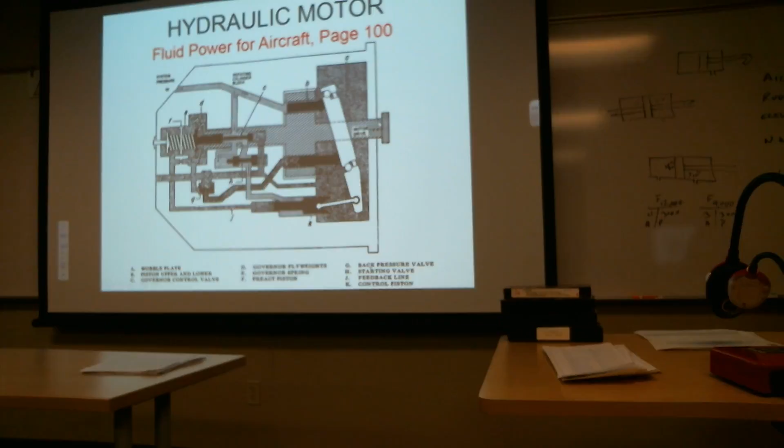Fluid flow coming into the motor slows it back down again. Similarly, if the motor shaft starts to stall or move at a slower speed, that influences the flyweights so they move closer inboard to each other, so there's less centrifugal force.

You'll pour more hydraulic fluid into the motor in order to speed it back up again. The valving is primarily controlled by a pilot valve. We've got the introduction of hydraulic fluid from the pressure source that comes into a valve labeled C. It's a governor control valve.

That immediately pushes over one of the slides on a different valve labeled H. It's a starting valve, and what that does is push this wobble plate over. That establishes the initial direction of rotation one way, so it can't reverse itself. It can only go in one direction of rotation.

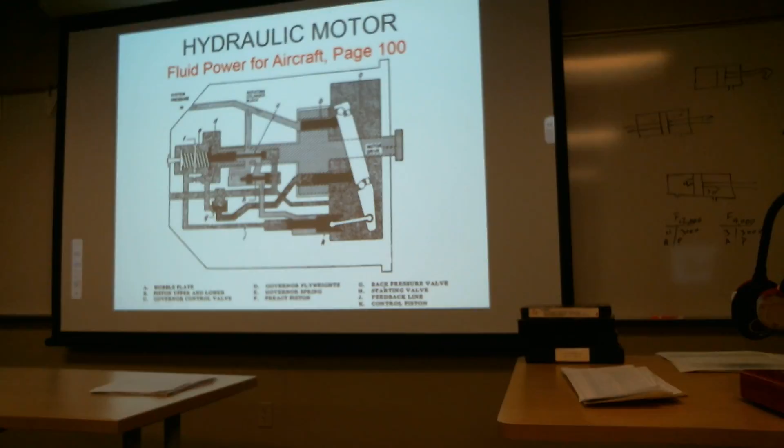From that point on, the speed is really governed primarily by moving this particular pilot valve piston back and forth, the governor control valve, and the opposing force would be the flyweights and this big spring that they have on it. So it limits the amount of fluid directed into the cylinder block and will control the speed of the hydraulic motor.

Examples of something like that are anything where we have to have the same speed all the time regardless of either pressure or the load imposed on the shaft, so we'll use a hydraulic motor. In this case it's non-reversible, but it provides for a governed type of speed. So it's a governed type of hydraulic motor.

There's an interesting device on back of the flyweight assembly piston. It's a pre-act piston. The pre-act piston prevents premature hunting of this pilot valve that's being moved. It provides kind of a counterbalanced force against that piston, or at least against the control valve, so it doesn't move too quickly or seek a position in excess of where it's being commanded to.

The adjustment of it—sometimes they've got an adjusting screw on the back of the hydraulic motor—influences the spring pressure on top of the flyweight assembly. So again, we can somewhat alter the set point for how fast that motor is going to be driven, or how it responds to torque. That's what they have.

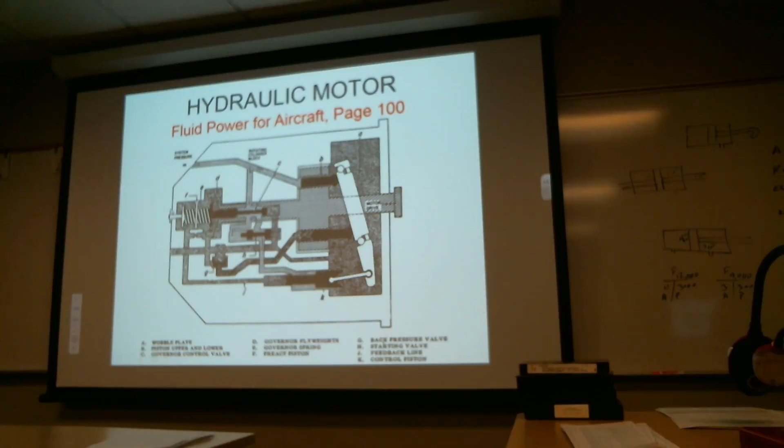A different type of hydraulic motor is a modification of a vane pump. It uses vanes, but rather than attempt to produce flow, we'll introduce flow into the pump from a pressure source and have a recovery point at the return. But we can make the entire core of the pump move.

What you're doing is trapping fluid between the vanes and the wall of the motor in order to make it rotate. These things can also be driven in alternate directions of rotation by using a selector valve that pours fluid alternately into the opposite cavities to make them work. Because it's a vane type, the rotor can be turned in either direction simply by reversing the fluid flow path into and out of the motor.

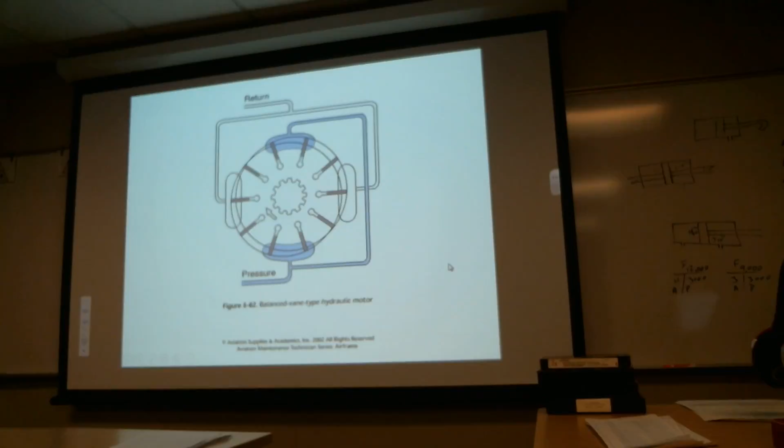Let's talk a little bit about flight controls for aircraft. I've already told you that for many hydraulic systems, they sometimes use a balanced actuator. In this case, I guess they've got a balanced actuator for the most part. But for a lot of aircraft, they use what are called tandem actuators for flight controls. These receive inputs simultaneously from independent hydraulic systems into a control spool actuator, or a control portion of the actuator that's physically attached to the actuator itself.

When we port hydraulic fluid into each of the cavities, the cavities become pressurized and will recover fluid from the alternate cavities. This is an attempt by the airframe manufacturer to provide redundancy in the hydraulic system. If we have failure of one hydraulic system, we'll still be able to use the other hydraulic system to power the actuator to make it move back and forth. So this provides for a degree of safety.

A lot of military aircraft and some civil aircraft use tandem actuators, and it goes to the same control—you might be powering an elevator, an aileron, or maybe a rudder—but nevertheless, you're using simultaneously two independent sources of hydraulic pressure.

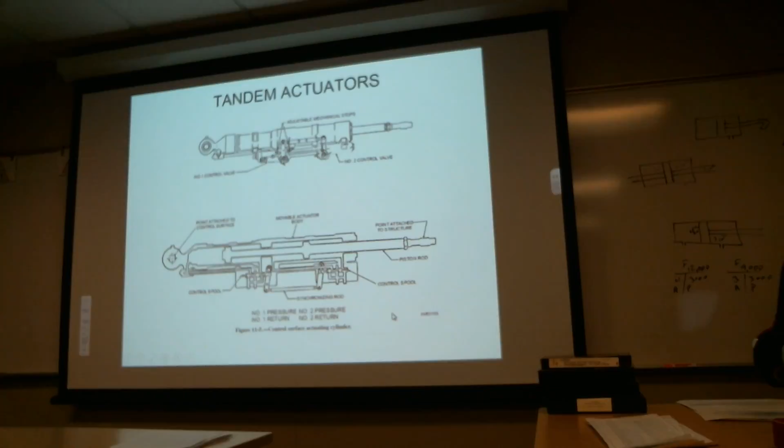We can set a desired course or path for an aircraft by commanding the actuator to assume a certain position. When we talk about tandem actuators, they've usually got two cavities inside of a single actuator. It saves space, but most importantly, we've got two separate hydraulic systems simultaneously driving an actuator. Sometimes another term used is redundant. So they've got two actuators essentially combined into one, but they're being fed from independent hydraulic sources.

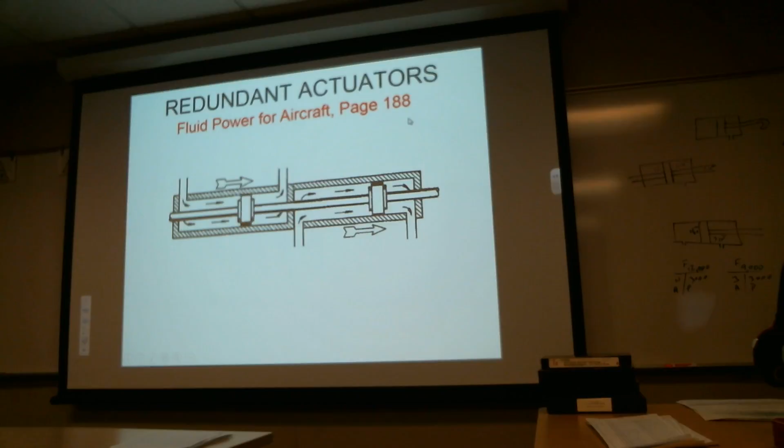There's a picture of this on page 188 of your airframe book. So redundant and tandem kind of mean the same thing.

Rack and pinion actuator. This is still a linear actuator, but what we can do with it is move a piston alternately with a rack that's attached to the piston, and then a pinion that rotates back and forth. Some Cessna landing gear, the 172RG I think, uses a rack and pinion type of actuator. The travel is usually about 90 degrees in order to make the gear come up and go down.

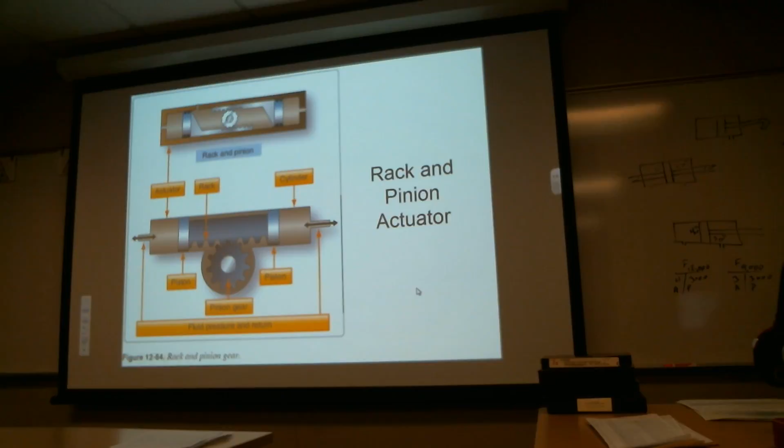There's another variation of it too. You can have a pinion, and as it rotates, it forces the pistons out, but you can see it's got kind of two pistons on the inside of it in order to make it move. Sometimes, again, maybe I'm thinking windshield wipers - some of the actuators operate that way.

Here's a close-up view of what you might find in some Cessnas for gear retraction. The piston could slide back and forth, but the teeth around the rack gear cause the pinion to rotate through an arc of about 90 degrees. The pinion shafts that hang out are attached to the gear. In Cessna, they use one rack and pinion actuator for one gear and another for the other gear, so you've got two in it for the main gear itself.

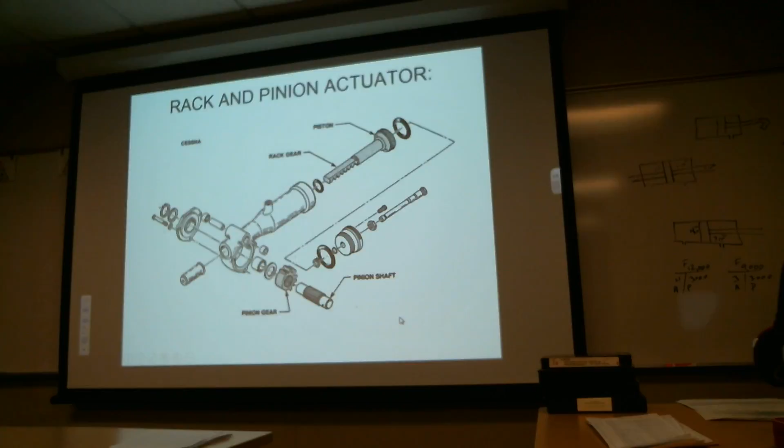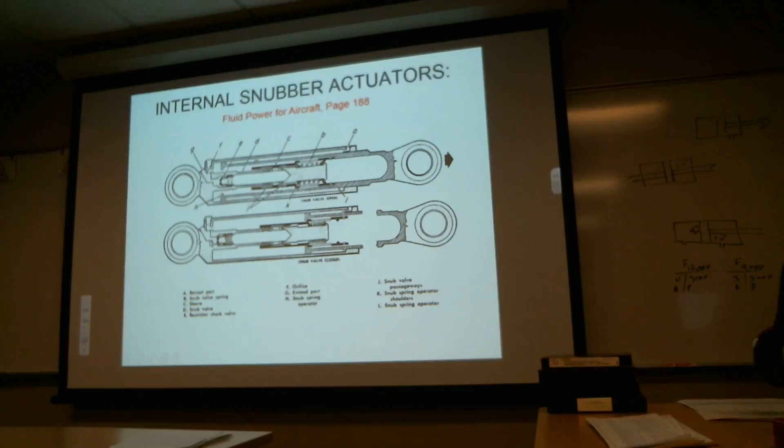If we want to cushion the actuator so it doesn't come to a crashing halt, this is how we would do it. The actuator will ultimately reach the end of its travel, but in a kind of graceful manner. It's going to slow down greatly before it reaches the end of its stroke. There's a lot of different ways that we can do that too.

This is an example of another type of cushioned actuator that they use on the E-2 aircraft for the landing gear. It works in a way that's very similar to a shock strut. If you were to dismember a shock strut, what you'd find on the inside is a metering pin, and as the piston is being slid forward, the metering pin finds its way into an orifice opening.

And that restricts the flow at the end of the travel. This one is kind of unique in a way too, because it's got a port that expels atmospheric air as the piston is being pushed over. And it's got a spring on the other side that will allow the poppet, I guess in this case, to also act as the cushion at the other end.

Kind of unique also with the actuator too, is one of the ports - this would be the down port for extension of the gear - contains an integral shuttle valve. The normal extension pathway is for fluid to enter into the shuttle, so it displaces the shuttle valve one way and allows fluid to enter into the cavity.

And if we do it for emergency extension, they use a confined gas under pressure, maybe a blow-down bottle, in order to accomplish emergency extension. So when we release that air charge, what it does is push the shuttle over, and it occupies the cavity in order for extension.

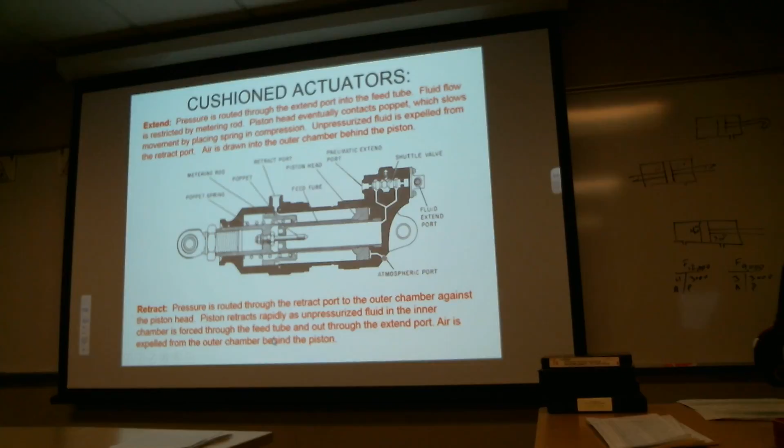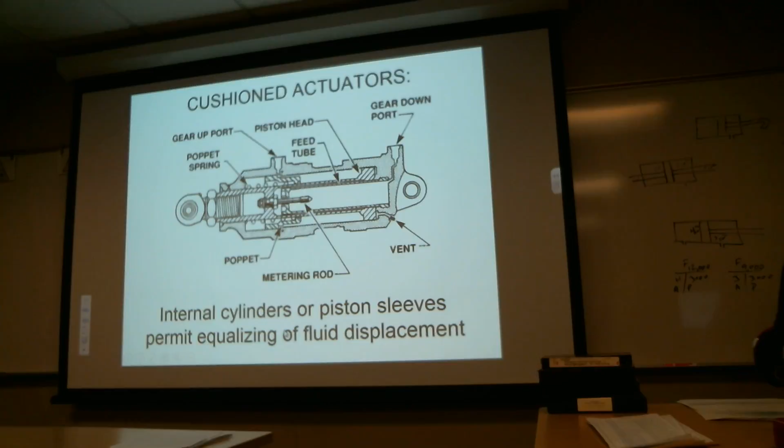Lock actuators - there's a lot of different ways that we can play this game too. If we have to have an integral mechanical lock in an actuator, like a landing gear, what we do is make one by having maybe a particular part of the actuator slide into a recess and be held there mechanically, sometimes under spring pressure.

In this case, they're using a ball lock. And what they're doing is forcing the balls to come out of a recess in order to make the actuator move. And then when the actuator moves to the alternate position, the balls fall back into a recess in order to provide for locking it.

So this one, the top picture, is gear down and locked. Balls are held in the race detents by a ball lock plunger. So I guess they're pointing over here - okay, they've got a ball lock plunger and they're holding the balls in position.

Down lock switch actuated by piston shaft groove. This device over here is really coupled to the indication system of the aircraft for gear down and lock. So when the gear is down and locked, this roller is in a recessed area, which completes the electrical circuit for gear down and lock.

When we want to unlock the gear, we have to apply pressure against the spring in that piston. It causes the balls to drop free out of the recess, and then hydraulic pressure can eventually move the piston. But you're using a mechanical lock that you have to physically unlock with hydraulic pressure to get it to move out of the recess. Down lock is released, piston shaft assembly retracts, and the gear is unlocked.

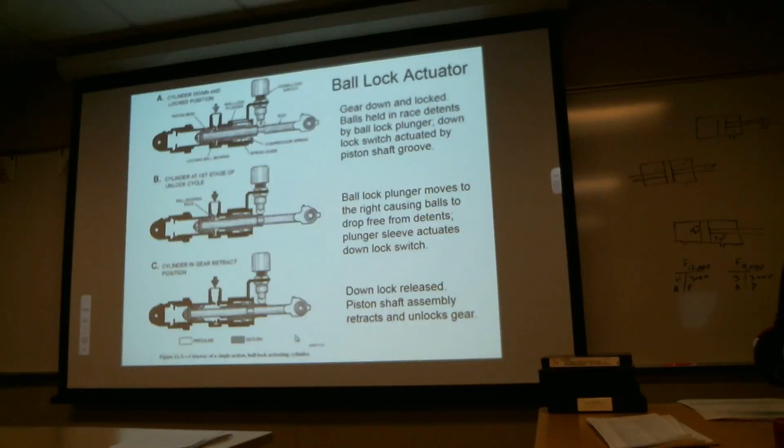This is kind of like what we have on the S2F landing gear. They've got a finger lock type of actuator where they use fingers that fall into a recessed opening, under a spring lock. And remember, for all landing gear systems per FAA regulation Part 23, the locking device for hydraulic landing gear cannot be hydraulics itself. It has to be a mechanical lock that has to be unlocked in order to allow the gear to retract. You can't use hydraulic pressure to keep the gear locked in the down position.

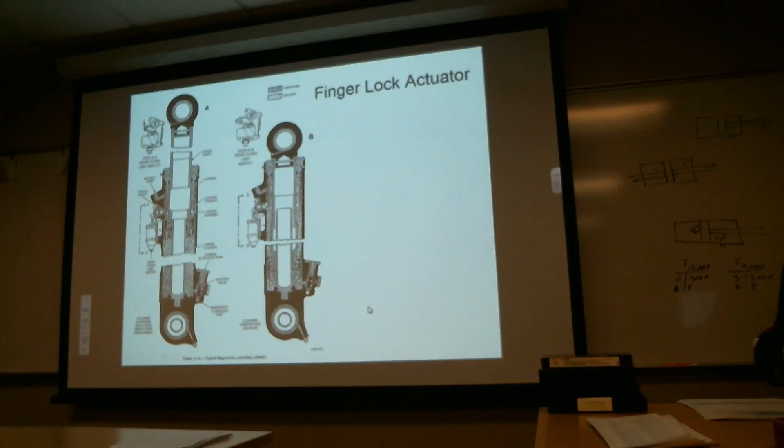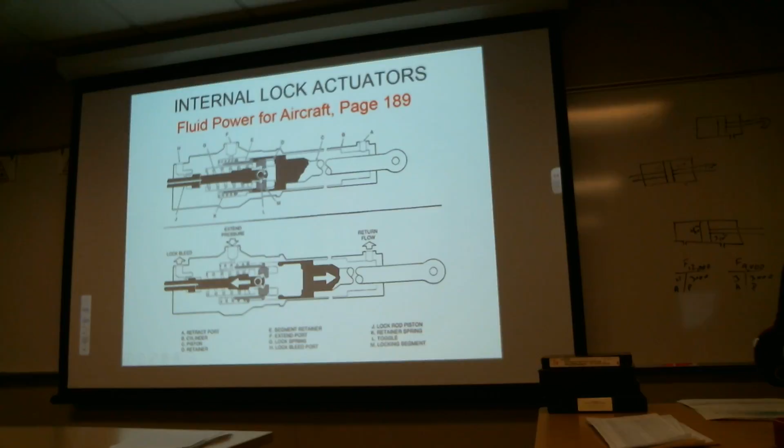There's a reason for that - obviously if hydraulic pressure is lost, there's a potential for collapsing the gear. So we have to have a mechanical lock incorporated as part of the down lock. Another type of internal lock uses a locking block with fingers attached to the piston. In the unlocked position, the initial force of hydraulic fluid forces the spring to collapse, and then these locking blocks fall out of position with the fingers attached to the actuator, and the piston can move. But again, you're using a spring with these mechanical blocks holding the piston in the locked position, and it can be unlocked hydraulically. However, you have to have the mechanical locking device installed so that loss of hydraulic pressure won't cause the gear to collapse.

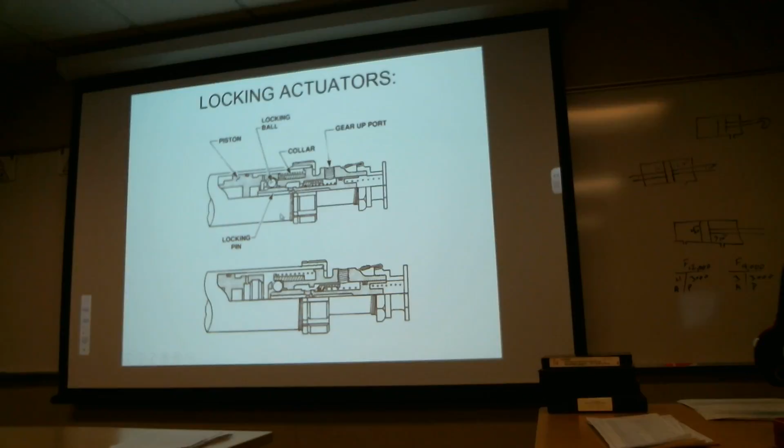Another type, a locking ball actuator, maybe a different view of it. This one looks like it's in the locked position. The ball is held inside of the recess, and then we apply hydraulic pressure. It pushes a piston over, compressing a spring. The ball drops out of the recess, and it allows the piston to move. Better view.

Okay, let's talk a little bit about servo actuators. Let's go talk about flight control systems for aircraft. This is kind of a cobbled together picture, but it gives you the idea of what we're trying to do with powered flight controls in aircraft. What we want to do is limit the travel of the actuator to a commanded position, just like steering your automobile. If we turn the steering wheel, we want to position the wheels on the ground to a certain amount of displacement. We do the same thing with flight control systems.

Now, it's crude in a way because many of the actuators for flight controls are balanced actuators, but for simplicity, just to illustrate the idea of a servo actuator working, they're using what appears to be an unbalanced actuator. The selector valve is physically coupled to the rod that's connected to the actuator to make the flight control move. So there's some type of connection that goes into the cockpit - it's a mechanical control in this particular case. If you pull on the rod attached to the connection point, you're positioning the spool, or pilot valve spool, in one position. That allows hydraulic fluid under pressure to be applied through the selector valve, ultimately ending up in the cavity of the actuator it's attached to.

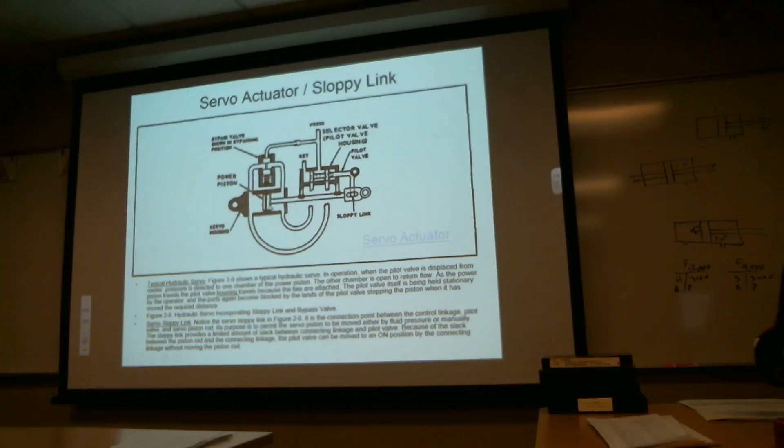This explains how we're getting powered movement, or at least multiplication of force, for hydraulic systems. This thing is actually minuscule in size for the amount of surface area that's exposed to fluid. You may have 5,000 psi in here, but only a very small amount of force is actually developed at this point because of the surface area. However, what's connected to the flight control, the piston, is relatively large. So this is what's giving you the opportunity to build hydraulic force, a multiplier of force.

Maybe a better view of what's happening with this type of actuator: the pilot valve and the selector valve are connected directly to the piston rod. So as the piston rod begins to move, the selector valve is progressively shut off from hydraulic pressure once it reaches a certain amount of travel. And it's all done because of that sloppy link, which provides a kind of loose fit connection between what's controlling it and the actual motion of the actuator.

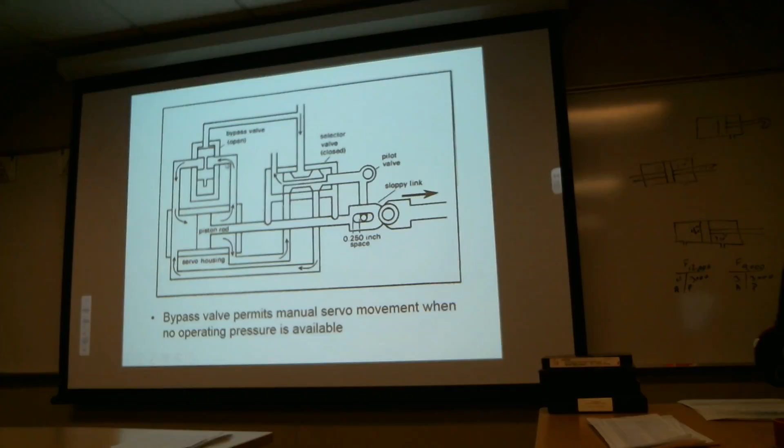And the bypass valve, this one's open. This would assume that maybe we've lost hydraulic pressure and we are now manually controlling the flight control. So we've got a mechanical connection, but this allows for the exchange of hydraulic fluid to the opposite side of the cavity, back and forth as required.

Another picture. I stole some pictures out of an old Navy flight Navigator manual or a training manual, and it shows you what they used in some early aircraft just for simple flight controls. This one is for an aileron from a Navy A4.

It uses a portion of the circuit that is mechanical. They'll use cable actuation through a mechanical connection that directly connects to the aileron. In the event of hydraulic failure, the disconnect that the pilot has is available here. This is a disconnect, so it's completely mechanical for operation of the flight controls in the event that the hydraulic system fails completely.

Normal operation, they have a utility hydraulic system that provides an independent source of hydraulic pressure, making it available to one cavity. The other side is a dedicated flight control system hydraulic circuit that provides hydraulic fluid to the other cavity in the tandem actuator. Both of them work in unison, usually through a tie rod.

And when we move the stick in either direction for left or right, what we're doing is we're simultaneously opening pathways through these pilot servo valves into the cavity. And then the actuators will move in response in order to make the ailerons displace. So pretty simple. Notice also something too, they've got a device that they call a load feel bungee.

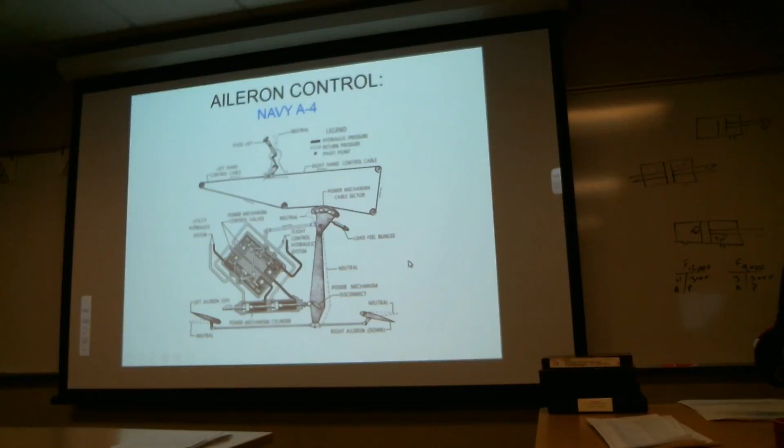Another one, this is a Navy A4 also. And in this case, they've got a tandem actuator, and again, they've got the control valve for the PCU incorporated into one unit. Normal operation, you're porting, again, hydraulic fluid from independent sources, in this case, hydraulic flight control system and utility, into pilot valve spools.

And then simultaneously, you're powering the actuator in one position or another, depending upon what you're trying to do with the elevator. And for mechanical override, they usually have some type of disconnect, and again, it reverts to a mechanical operation simply by unhooking this. So the pilot has the option of disconnecting it, and from that point, it provides for direct control by push-pull through manual operation. I don't know what they have in here for bungee. Maybe they don't. So nothing for load feel, I don't think.

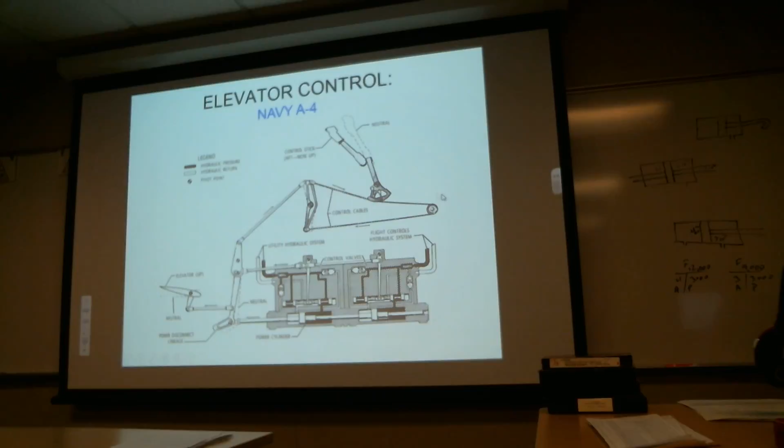And this one is for a rudder control. This is a Navy A5. They've got a load feel bungee in the circuit, and again, a spring cartridge. Seems like anything that has a spring or a spring-like action they refer to as a bungee. Even if it were to have a pneumatic charge in it that would be compressed, they call it a bungee. So anyway, they call it a bungee.

Rudder pedals, deflection of the rudder either way, goes through cable and through pulley, but ultimately it terminates into the control for the rudder, the pilot valve spool. Similarly also, you'll notice that they've got a tandem actuator, and coupled with it, they have two pilot valves. The pilot valve moves left or right. What it does is it ports simultaneously fluid into the actuator in order to displace the actuator. And then when it moves in the other direction, the spool slides over. And ultimately the fluid is shut off, again, because of a sloppy link that they have in the component.

So it controls it, or it shuts itself off after a certain amount of deflection. You'll notice something here too. They've got something kind of weird. I don't know what you can infer that to be.

It says AFCS. What does that mean? Flight control system. That's a flight control system.

In a lot of the flight control circuits that are automatic, they've got a reed type of device, and what they'll do is bias the motion of this pilot valve spool using two diverter types of squirter valves that work on the reed. By introducing electric current into the coils next to that reed, we can restrict or allow hydraulic fluid to flow, and that influences the motion of that pilot valve spool.

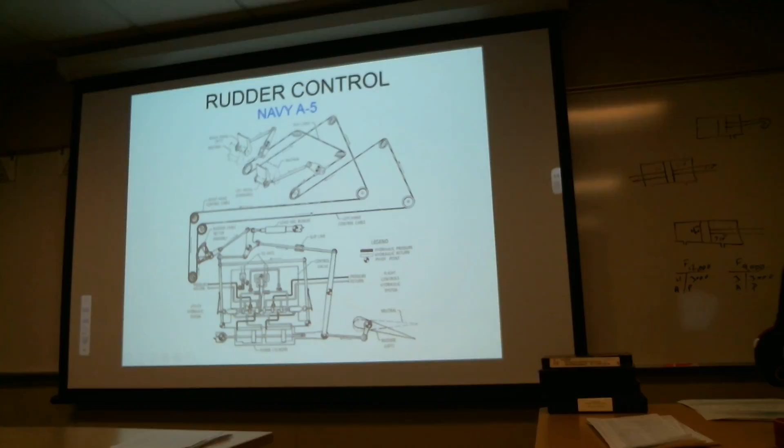If they want to prevent a skid from occurring on tires and wheels, they dump hydraulic fluid going to a brake. This prevents the rapid spin down of a wheel and tire, reducing the potential for a skid. It'll allow the tire to somewhat slip, but it won't develop a skid - just reduces the speed slightly, but dumps the hydraulic fluid. I'll show you how that kind of works after dinner break.

This is, I don't know if it's a handout, but this will describe it. It's in your student PowerPoint as well - more of an engineering type of thing to actually make it work, but sometimes they just got a coil that moves the reed one way or the other. Ultimately, it influences the pilot valve so it can control the direction of the actuator that's moving what we want to move.

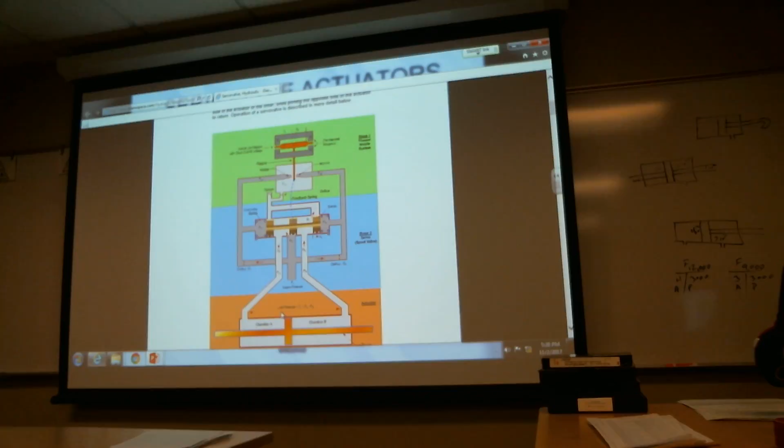Let's see what else I've got here.

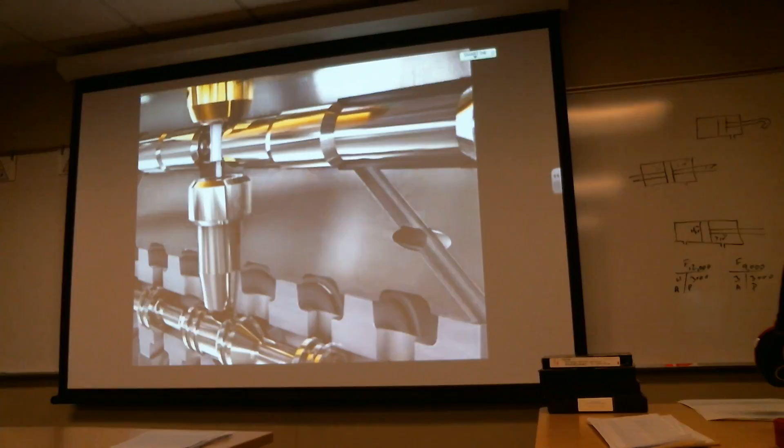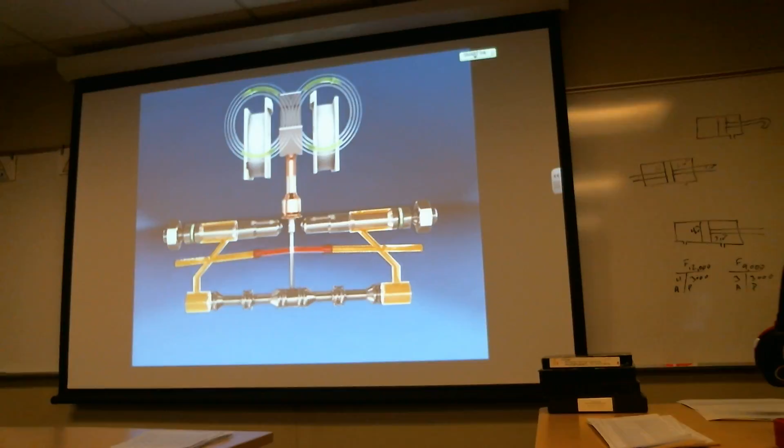The idea is to control the motion of this device, which then causes the pilot valve spool to be moved in order to make the actuator piston move as well.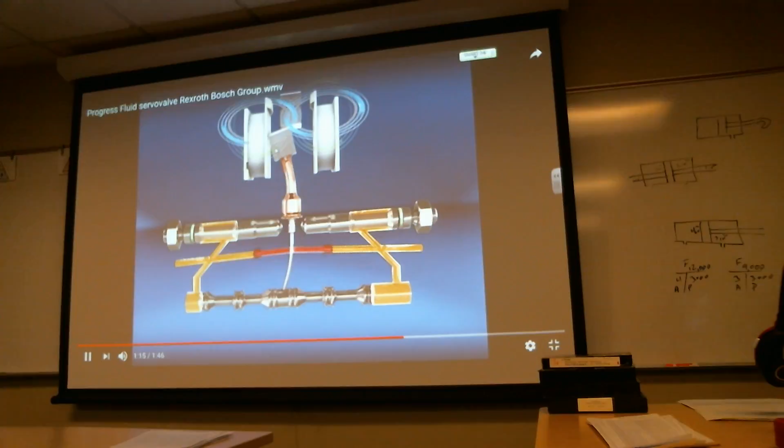So you can see what they've done is they've got an even better picture. Here's the pilot valve spool. They're showing you the red as being pressure.

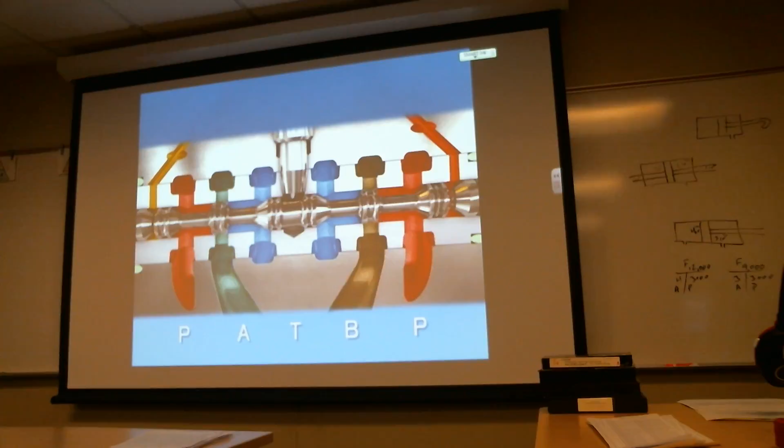But anyway, torque motor type of control for a lot of the electronic flight control systems. I'll show you something after break to kind of sum it up how it works.

They're really complex. This picture is from a MiG aircraft, but it kind of describes what's happening. I don't know that this link works anymore - it was a part of flight control, but maybe deactivated. Let's see, yes, it's been taken away.

I had a YouTube video that showed the motion of a hydraulic actuator with a ground support source, but you could see that they use springs for load feel in it, and they also used balanced actuators to make it work.

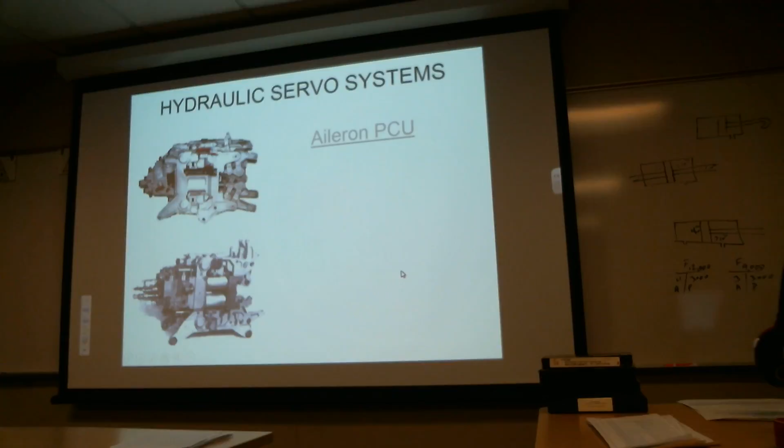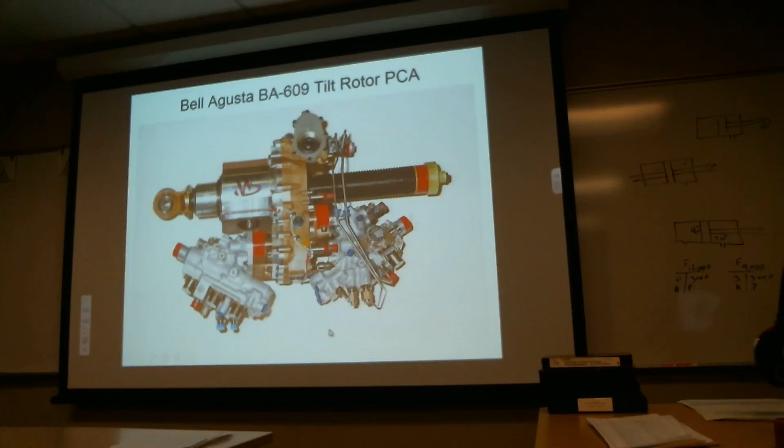Man, talk about complex. This is Bell Agusta tilt rotor actuator, servo actuator that they have. Don't ask me what port is what, I have no clue. And again, another rudder power control unit.

This one has got a balanced actuator in it, and they probably have a method of disconnecting it should the system not work. But the method of controlling the pilot valve spool, they use a servo valve that can position this pilot valve, which ultimately controls the motion of the actuator. And usually a sloppy link, in order to limit the amount of travel, they've got what they call a follow-up lever in order to do that.

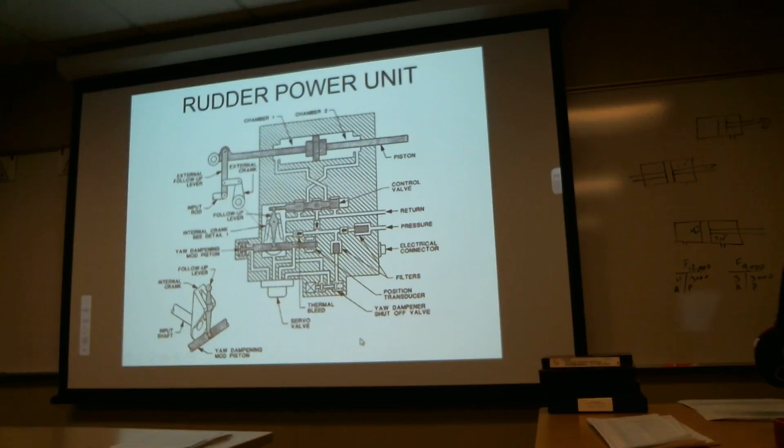If you attend a particular service school for a certain aircraft, they go into excruciating detail on how these things work. But it varies from aircraft to aircraft as far as the architecture is concerned.

Another one - you know, the textbooks give you this picture, but they don't show you exactly what's happening in it. Anytime they talk about a follow-up linkage, this is kind of equivalent to the sloppy link that provides for turning off the actuator once a certain position has been commanded. So that's the idea of follow-up.

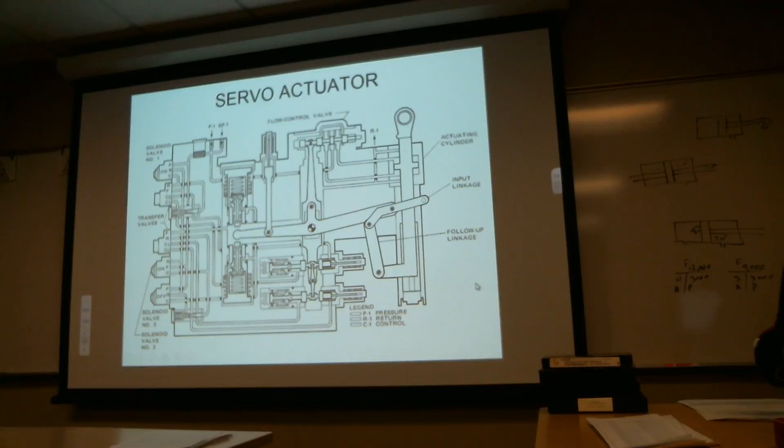An example of a Jet Ranger: the actuators are attached to, or move, the swash plate of the helicopter in order to change directional motion, and it tilts the upper swash plate to provide for motion in pretty much all axes. You've got three actuators that are used on that aircraft.

One of them is a collective actuator, and what that does is it changes the pitch of all of the blades at the same time by pushing up on the swash plate all at once. The other actuators tilt the swash plate in order to provide for lateral and fore and aft motion of the aircraft. But what it's doing is disrupting the plane of rotation of the rotor blades to provide for motion. These are power control operated actuators as well.

This part of the housing is really where the pilot valve spool is contained. The motion from push-pull rods influences the pilot valve spool, which then diverts hydraulic pressure and provides a cavity for return, or a return path back to the reservoir.

What do they do in this aircraft for malfunction? Well, they've got a solenoid valve that's in the aircraft. If the pilot wishes to not have boost of hydraulic pressure, the solenoid valve is turned off, and what that does is provide for direct mechanical connection from the push-pull controls into the servo valves.

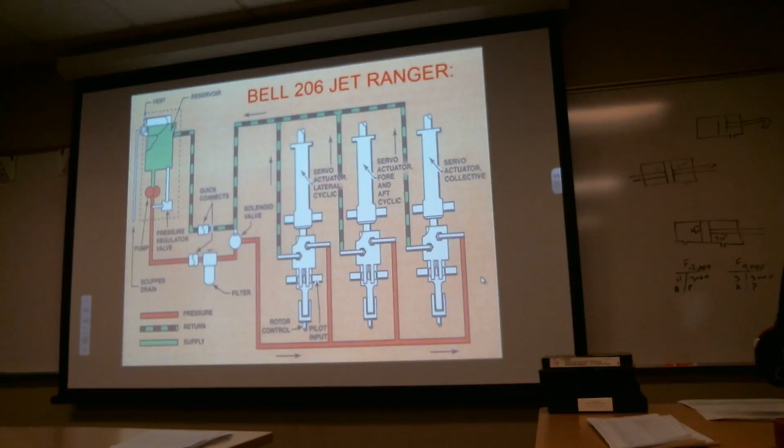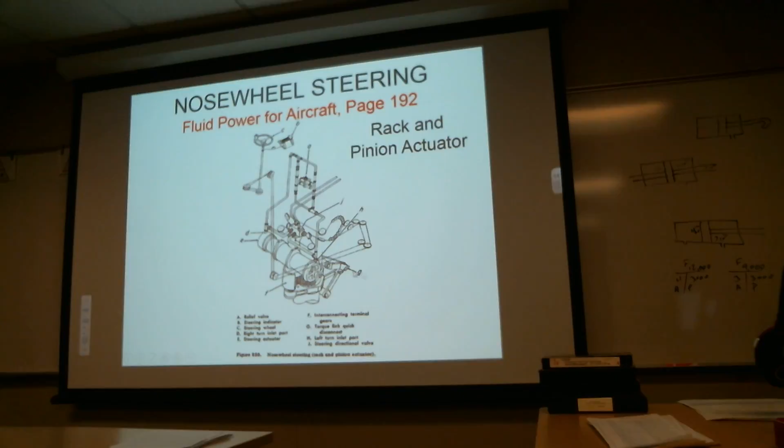Older aircraft is really complex. They sometimes use rack and pinion type actuators for nose wheel steering, and a lot of cable runs were used with pulleys in order to make the pilot valve run. You can read about this in the Merrill Fluid Power book.

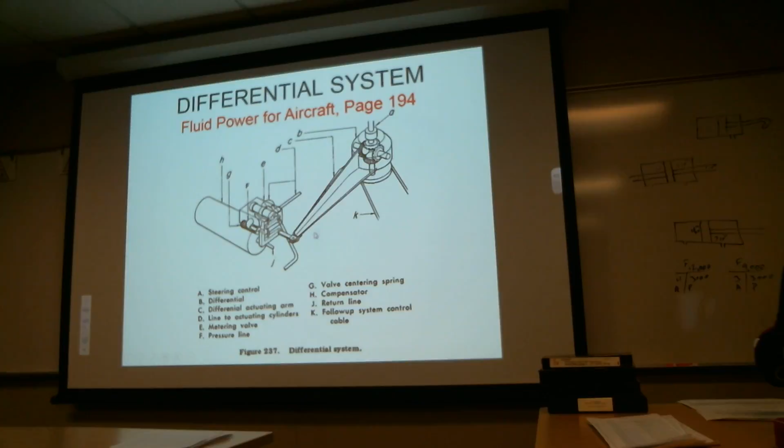In some cases, they had kind of a weird type of valve that they used to control the motion of the nose gear. But there's the selector valve for it, and this actually goes to the actuator.

Steering damper - this is what they use in modern aircraft for artificial feel. Remember I told you in some really early aircraft, they use a spring that's compressed to provide artificial feel. That works really well when there's a lot of control surface deflection and the aircraft is relatively low speed. However, for tactical aircraft or aircraft that fly at high speed, where you have a limited amount of surface travel or control surface deflection, it's not practical to use springs for that type of deal.

You have to use something that provides for a force field to simulate load. So they use a device called a Q unit, and it receives signal in most aircraft from an air data source, usually from an electronic monitoring system, just like pitot-static. The faster the aircraft goes, it provides for a greater force field in order to counter the motion of the actuators.

In this case, they use a separate actuator - they call it a load field jack that's connected to the flight control, which provides for a limited amount of resistance to simulate load. And again, it's called a Q unit.

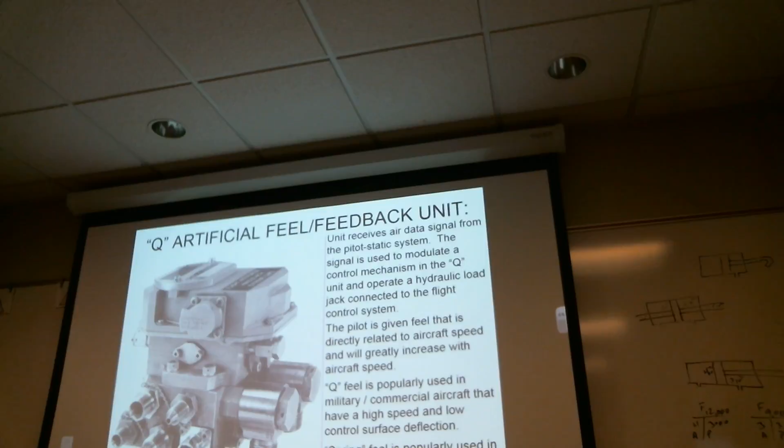As aircraft speed increases, it increases the amount of resistance required to power the flight control. Military and commercial aircraft with high speed sometimes use low control surface deflection. Springs are usually used on aircraft with lower speed, like those early military turbine engine aircraft I showed you, which are considered low speed today. It's kind of crude to see springs, but they did it in older aircraft with greater control surface deflection, and springs would work in that case.

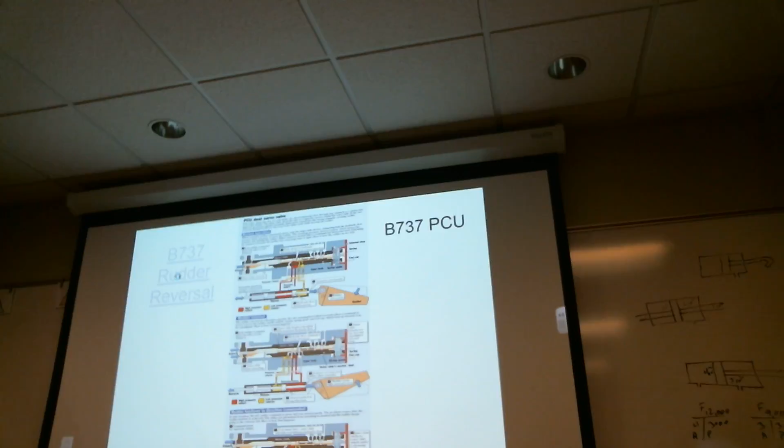I don't know if you're aware, but the Boeing 737 had growing pains. There was a particular problem in some versions called rudder reversal or rudder hardover. I'm going to show you a bit of video on it, and I'll also send you a link you can read. At least a couple of aircraft crashed as a result of having an uncontrolled rudder that deflected fully and ultimately burnt a hole in the ground. Kind of tragic in a way. The cases were investigated by the NTSB, and a lot of conclusions were drawn from it.

One big thing noticed in the design of the 737 was that it uses a dual spool type of controlling mechanism for the actuator. Even though they separate two distinct hydraulic systems, the spool itself is like a slide covering another slide, so it's not like having two separate pilot valves. They've got two sleeves that slide over each other to port hydraulic fluid. This is very different from other Boeing designs—the 707, 727, and 747 have different pilot valve spools that independently control the flow of hydraulic fluid.

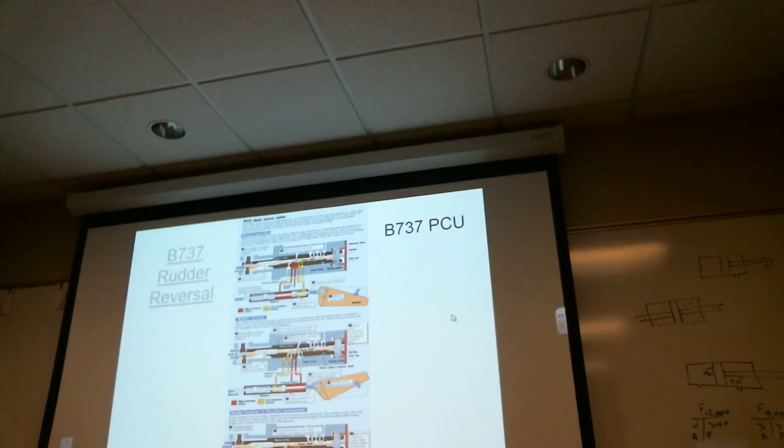Early in the discovery of this problem, pilots were taught to immediately pull the circuit breaker for the flight control system to gain manual control, because no amount of foot pedal pressure could relieve it once it began. They didn't know exactly what to do, and the NTSB was never really able to come up with a definitive answer for why it occurred. They just followed a path of retrofitting the aircraft to the previous design to eliminate the problem. Very tragic how it worked out.